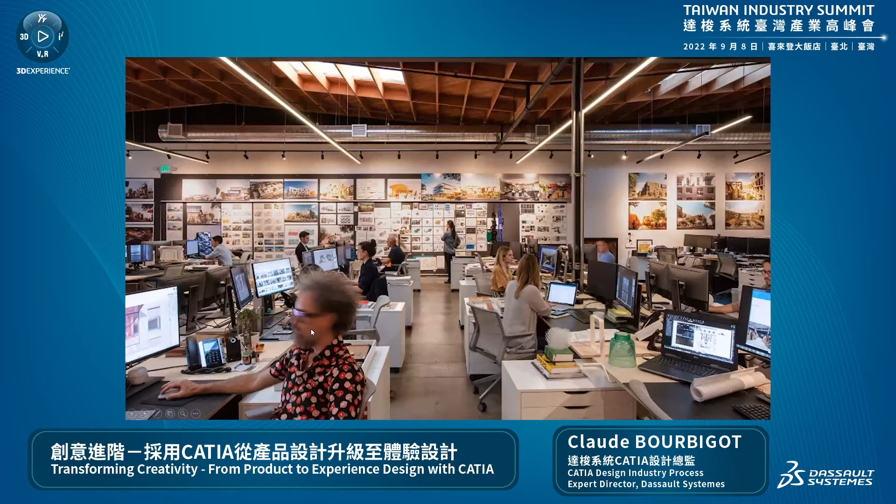One of the keys to drive these paradigm shifts is the design studio. They are at the forefront of innovation, but this is new. In the past, it used to be a mean to improve the style of a product, to make it appealing, more beautiful, but not really at the core of the innovation process.

Today, designers have a much bigger role and responsibility than ever before. They have to define new, exciting consumer experiences that can make a difference between success or failure of the product. We have to improve our design solutions to support them, their challenges, and their digital transformation.

So to make it, we at Dassault Systemes have our own design studio led by Anne Asensio, who is the former head of design at General Motors. What we do is to show, to prove, to explain how the platform can serve the new way of design, which we call the design thinking.

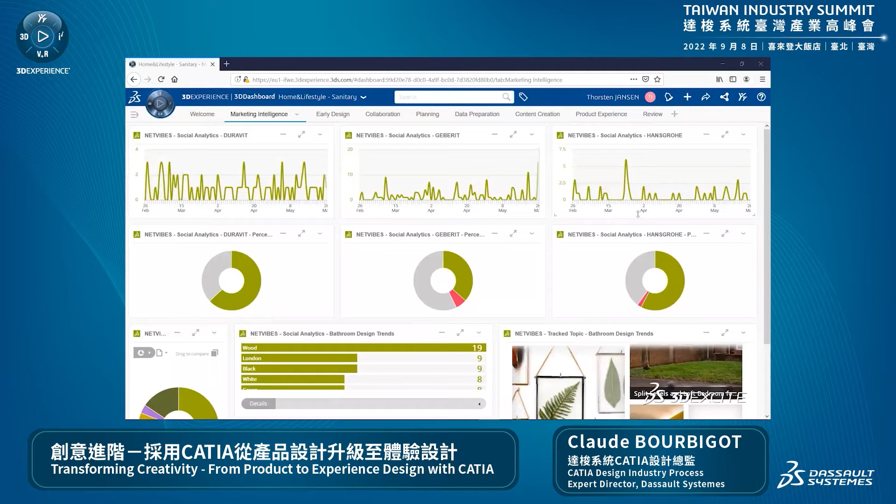So for this, we on the platform have Exalead and NetVibes. They are about information intelligence. They enable organizations to gather, align, and enrich big data. They deliver that information to users within high-value applications, the widgets that you can see here on the browser.

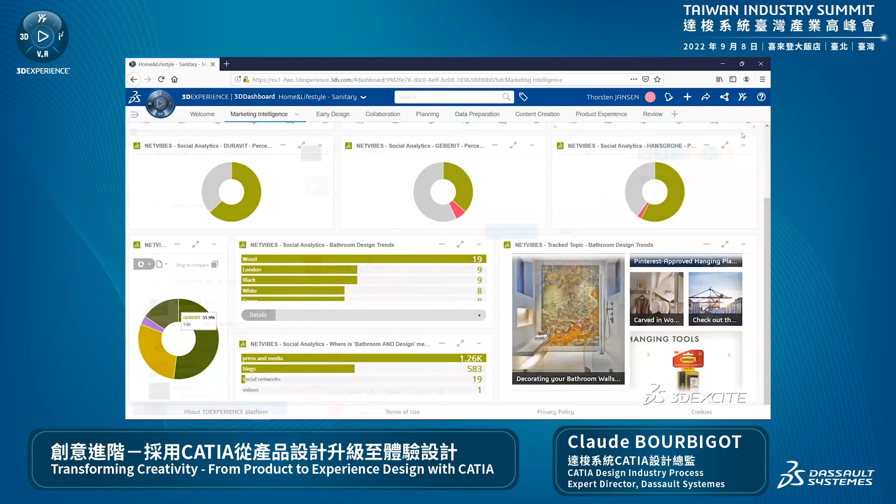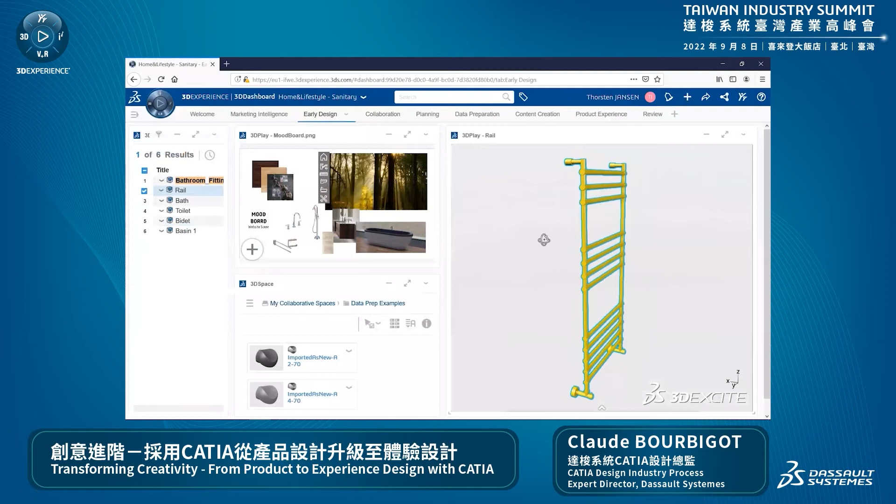Specifically, Exalead is a web-scale search engine designed for enterprise usage. It analyzes and enriches raw data by surfacing hidden information and relationships. With these analytics available, marketers and also designers can better understand the markets, the consumer behavior, and the community needs to tailor their offerings. Designers are able to envision compelling consumer experiences and make informed decisions, considering all relevant parameters.

So here in the video, you can see some of the widgets or the applications on top of the platform that you can use at the beginning. Here is the one for presentations.

So then let me move over to where Catia solutions excel the most, which is the ideate phase of the design thinking process. But first, I need to explain the overall split of the solution.

In creative design, we offer industry processes, roles, and applications, focusing first on creativity and ideation in the early stage. In the second domain, we call surface refinement, we are covering the needs of designers, modelers, and engineers for high-end surface with quality up to class A. We are also delivering solutions for the process of reverse engineering.

In the third domain, product experience, we are delivering visualization solutions for experts and non-experts. It includes high-end visualization for product presentation, but also design review tools and tools for perceived quality. Additionally, here we offer fully integrated individual and collaborative virtual reality experiences for the platform, and easy-to-use basic VR review capabilities for some of our legacy solutions.

We have a solution targeting creative designers. Good industrial design needs to be human-centric. Supporting this view, we have created the human experience applications in order to provide designers a human reference in the 3D space. It can be accessed at any point of the design process - at the beginning, ideation, or even at the later test stage. For this reason, we provide this 3D mannequin with all the roles and package by default.

It is available in many different variations and can be customized in size, proportions, and visual traits, with a vast set of postures already available out of the box in the core application, and changes possible on the fly. We believe that with this, a big part of possible user scenarios should be addressable. So you will see this mannequin later in my next videos.

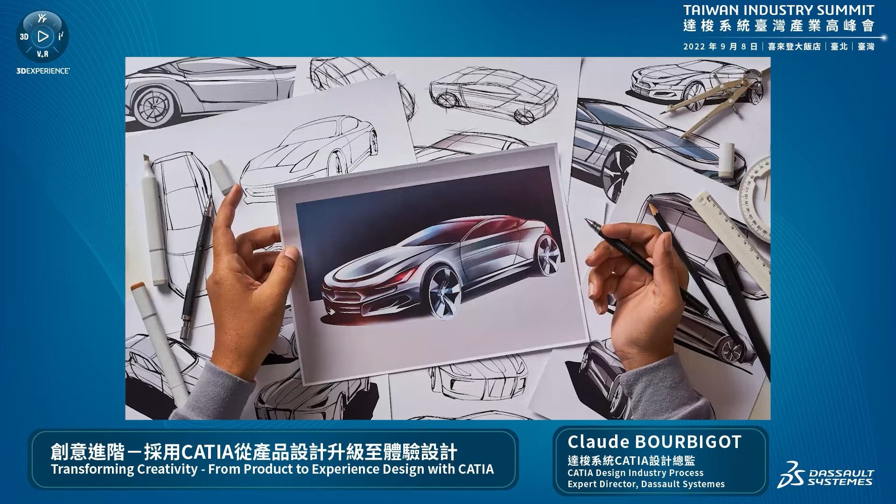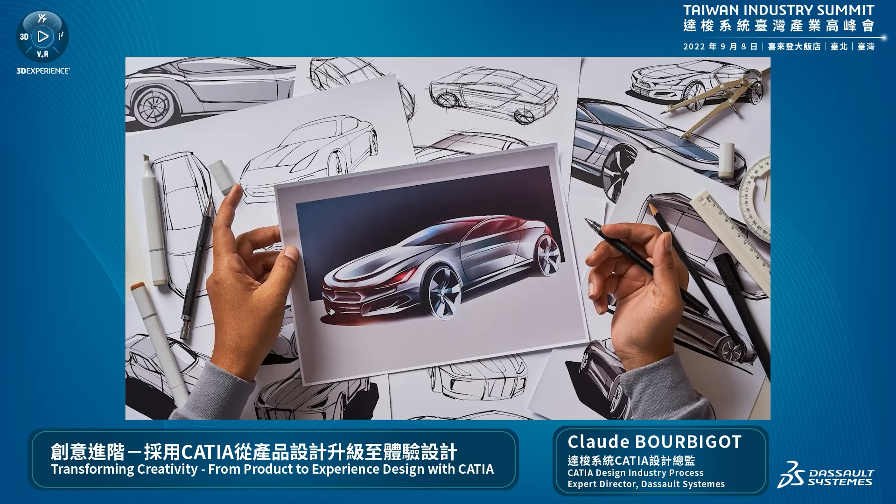The second important thing is about sketching. Of course, 2D sketching with pen and paper is still very appealing to creatives and designers. Nevertheless, there are downsides to this conventional approach. To communicate design intent, spatial correctness is really difficult to achieve. So also, while we all love sketches with emotional and artistic exaggeration, it is in fact often creating misconception about the object, especially with modelers who need to transform this idea into a first concept.

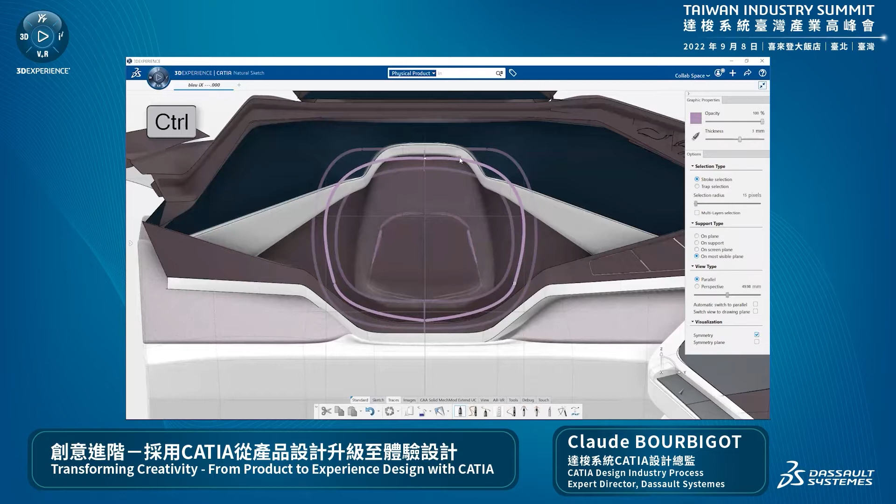Therefore, we developed Natural Sketch. Natural Sketch that you see here, a screenshot done with a Wacom tablet, offers a very elegant and progressive way to satisfy both the need for artistic expression and spatial accuracy.

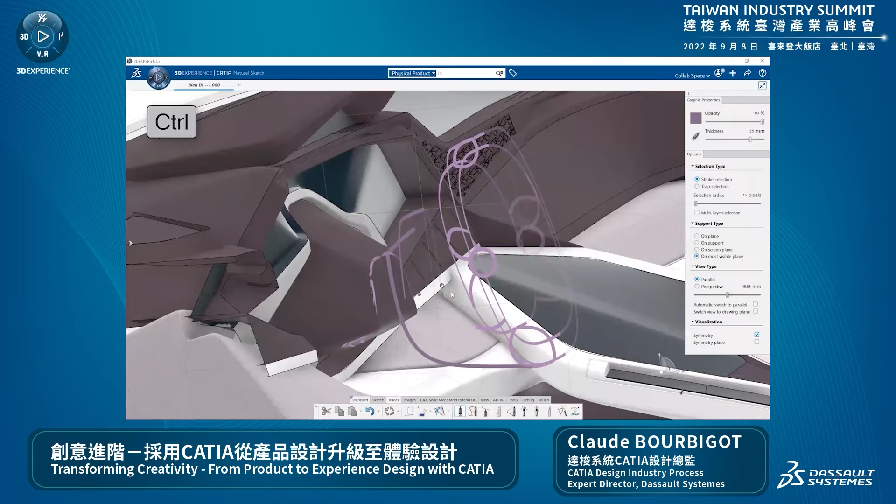Designers can start out in a very conventional 2D fashion by starting to sketch in views or using as reference scanned images of their paper sketches, even in 3D. Thanks to dedicated commands, the step from 2D to 3D is quite small. 3D curves can be created from sketching a curve from 2D views. As the resulting output could be Bezier curves, you can edit and modify the shape, also using direct modeling techniques like control points, or simply redraw and modify it by another pen stroke.

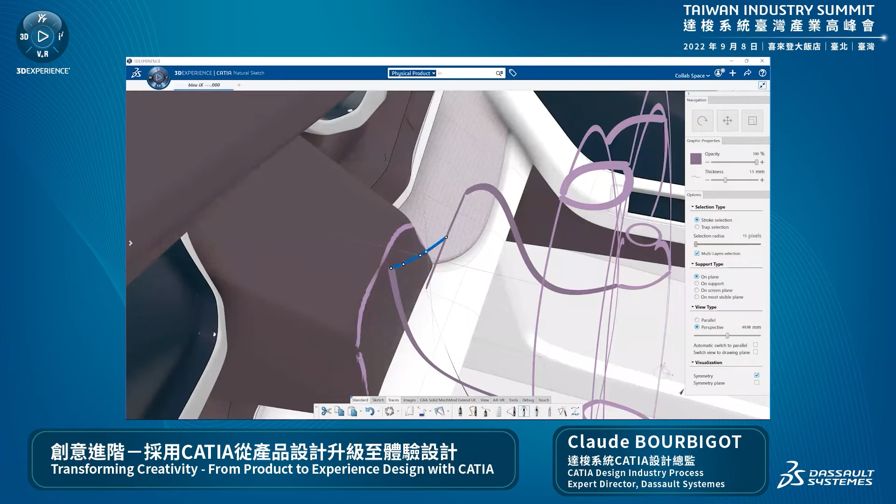So the biggest benefit of being in Catia's 3D environment is to be able to use existing 3D geometries and parts as a reference of the initial design. This will be shown in the next video.

So this I want you to see. Yes, the last thing is that if you have an existing surface, you can draw on top of it as well to continue the detail. And that's an example of a steering wheel output that you can get with Natural Sketch.

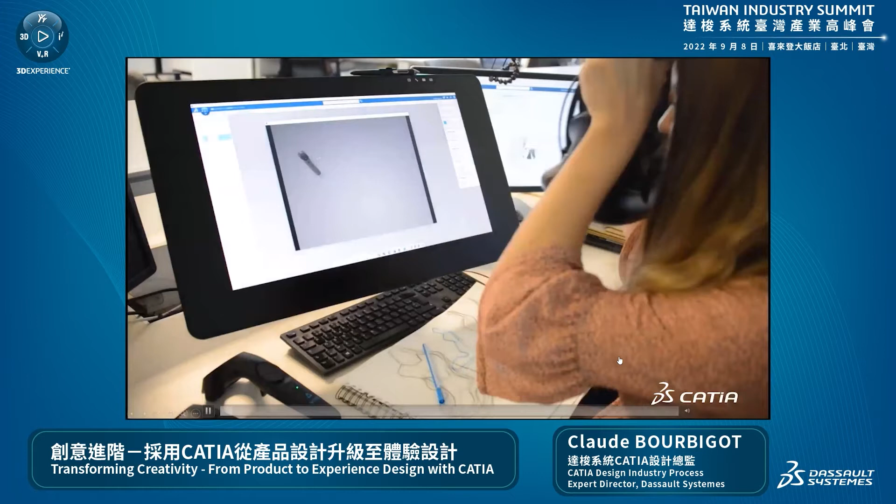But there is a next level, and the next level is VR. With Natural Sketch, we can also do it in VR. Thanks to the full immersion, proportions and shape can be experienced more realistically. A dedicated user interface allows creating designs directly in 3D space with the controllers of the VR head-mounted display.

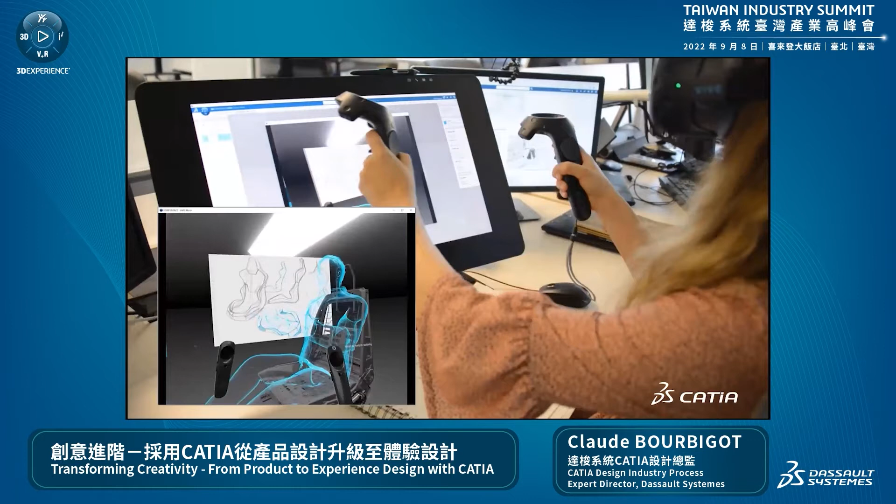We think that a hybrid approach, VR and non-VR, is best. For instance, one workflow is to start out with digital pen and tablet to create the first 3D curves, then move to VR to modify and experience the space more intensely.

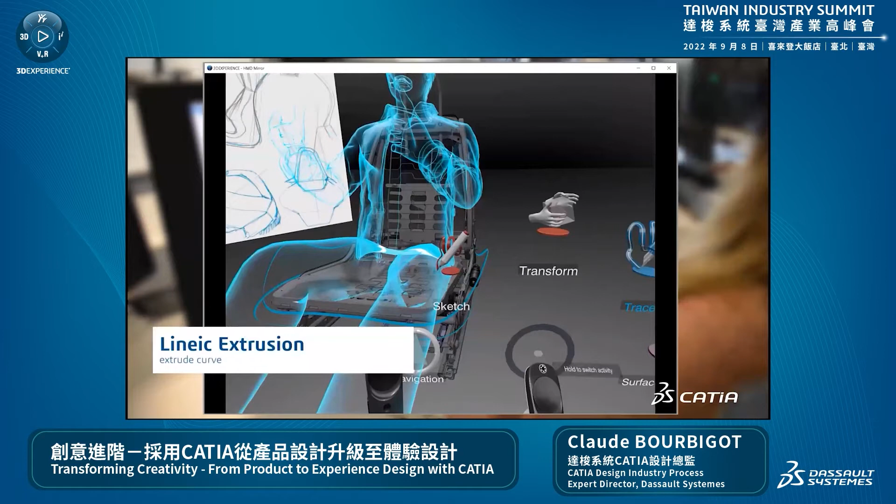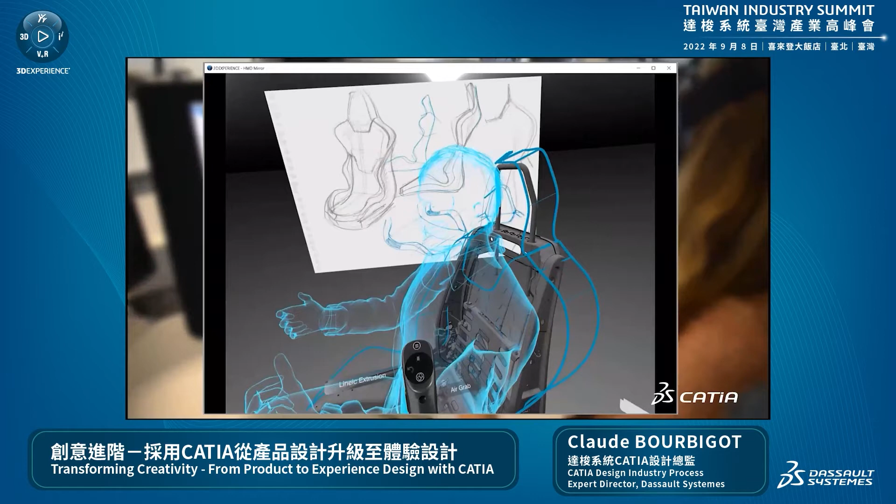On top, you can see here one of the biggest benefits of being on the platform is to access engineering data natively without the need for conversion. So you make sure that design is taking into account all the technical constraints from the start. You can see also here that the designer is sketching around the human as a reference, the mannequin again.

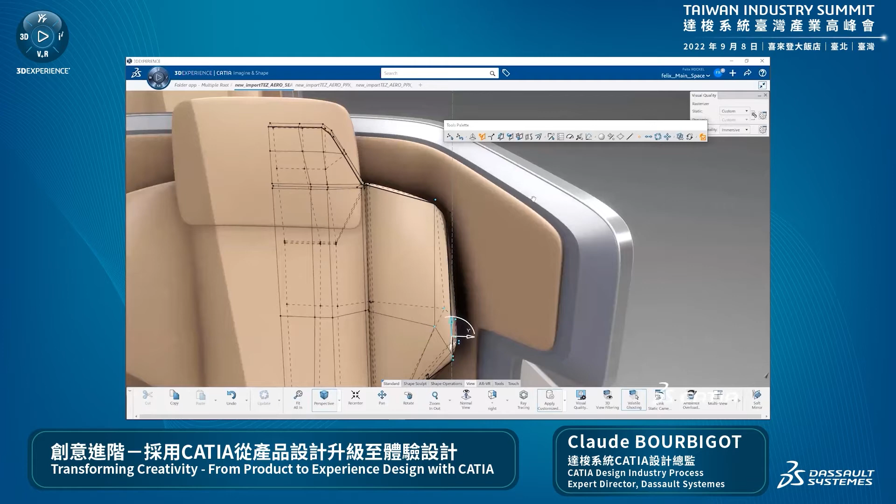So without transition, moving on to concept modeling, let's have a look at Catia Imagine and Shape. Whether you are starting out based on the curves created by Natural Sketch or not, IMA enables users to quickly create curvature continuous surfaces while avoiding all the difficulties of classic surface modeling.

It's based on subdivision surface technology, but delivers a unique modeling experience. While the creation of the base mesh follows the rules of polygon modeling, at the same time, in parallel, Catia creates a surface, so there is no need for additional operation to create usable surfaces.

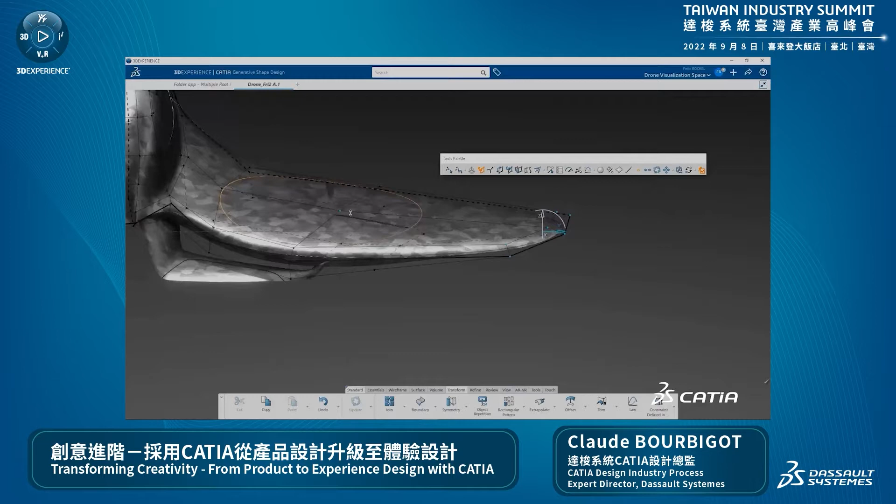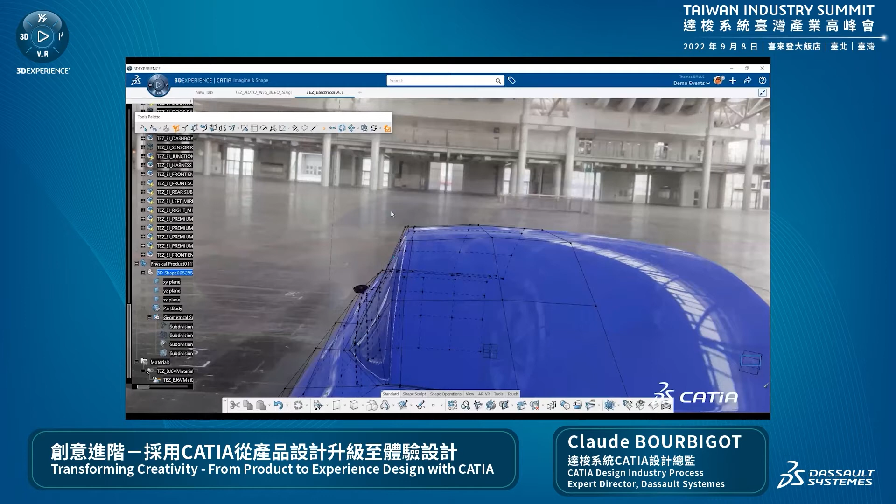Also, these surfaces can be passed to any downstream process, for instance, for engineering. It can be started in parallel, saving decisive development time. So we can mix subdivision surface with NURBS and Bezier, no problem. You can cut Bezier NURBS with subdivision surface, but you can also do the other way around, like adding fillet to an edge of an IMA surface.

Thanks to the ambiances provided, modelers are able to experience their model in different environments and lighting in real time, allowing for a better understanding of shapes and surface quality. You will see this in a few seconds.

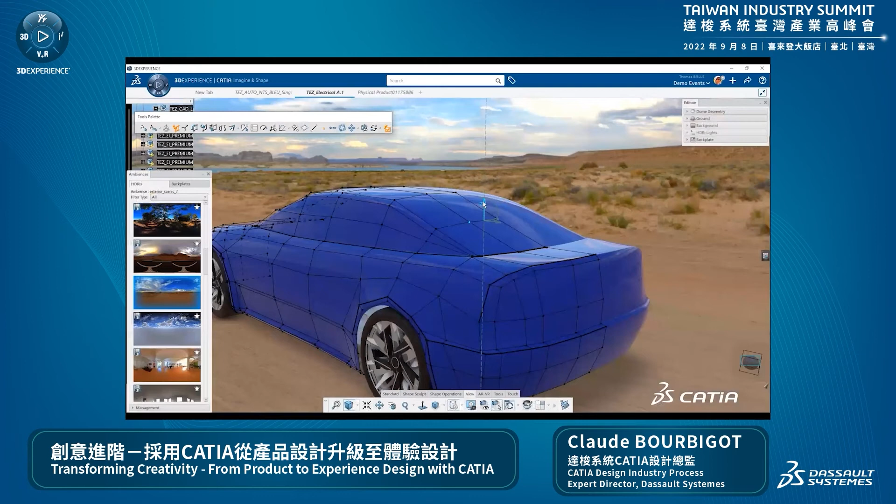As another added value, users are able to launch the real-time ray tracing engine with a click of a button, like here. The global illumination technology provides physically correct rendering, so users can switch between modeling and reviewing the product in a flick of an eye.

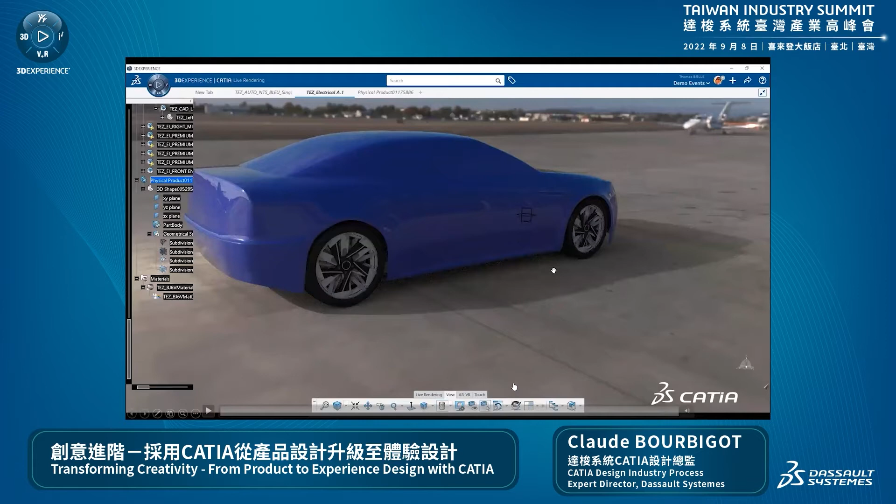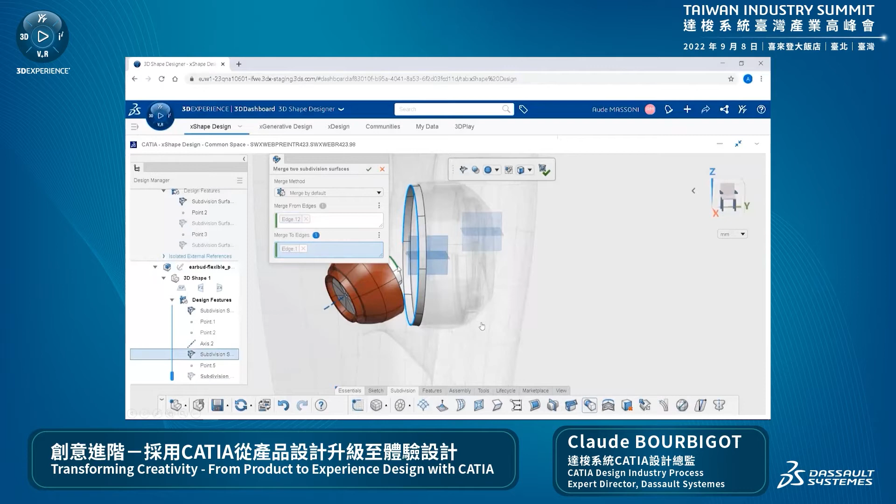Also, recently, we have introduced a new role for nomad designers. They need a high degree of freedom in terms of accessibility of tools and mobility. This solution is cloud-based and accessible via web browsers, nothing to install, which means the applications can be used on mobile devices too.

One of the trends in recent years has been to introduce 3D patterns inspired by nature and integrate them into product design. We introduced Catia xGenerative Design for this. Functional nodes are combined to form complex generative algorithms, which in turn generate complex geometric patterns in 3D space. It's also based on cloud and accessible through a browser.

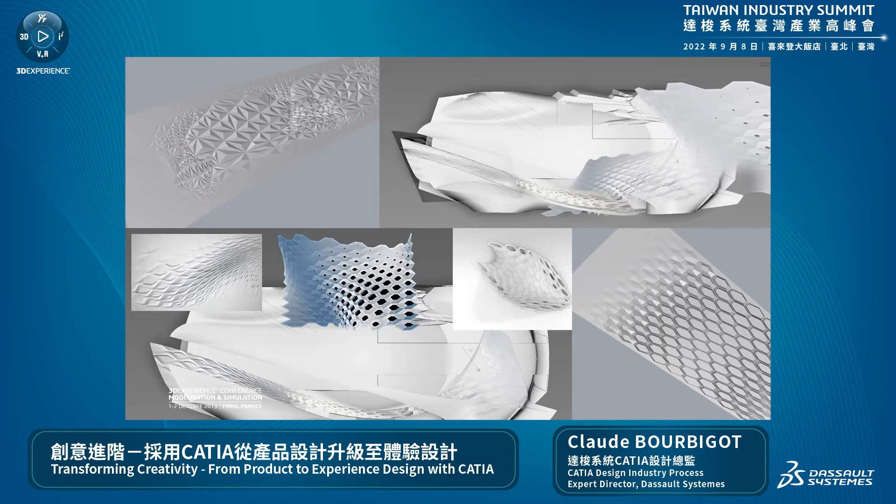So now let's move to the next stage in the design thinking process, which is prototype. It corresponds to our surface refinement offering. Historically, ICEM Surf, as part of our portfolio, has been and still is the leader for explicit Class A modeling in the world. So you can do very quick Class A level shapes without history and direct modifications. But in order to address the needs of our customers for a fully integrated Class A solution in Catia, we created Catia ICEM, which is fully associative and parametric Class A modeling solution.

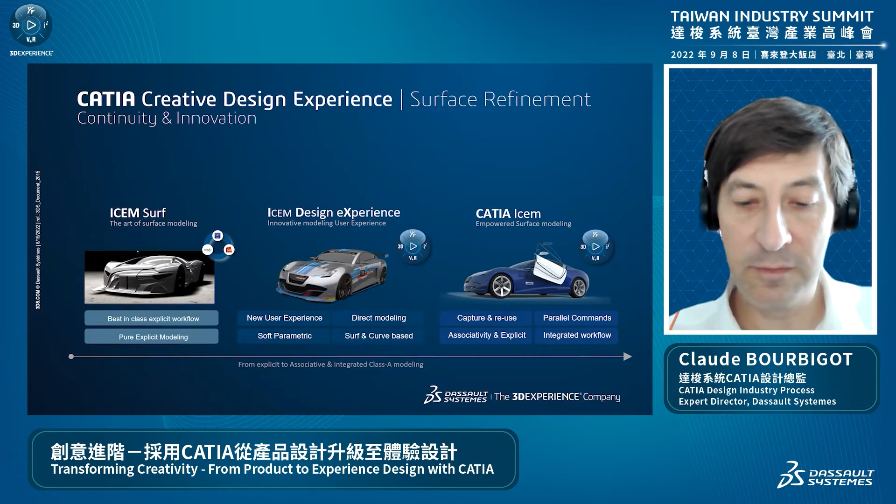Now let me introduce our new leading solution in this domain, ICEM Design Experience. It merges the two user communities, ICEM Surf and CATIA Icem, and the two modeling philosophies, into one application within the platform. So with IDX, we deliver a new level of productivity and innovation.

We have been studying the user experience in our current solutions and focused on reducing mouse mileage and clicks. We want to offer a new user and new modeling experience to customers of our legacy solutions like ICEM Surf, but also those moving over from competitor solutions.

ICEM Design Experience is not only for Class A, but also for CAS modeling. Sorry, I saw that I had some video issues, so you will be able to cut here if necessary. So let me continue.

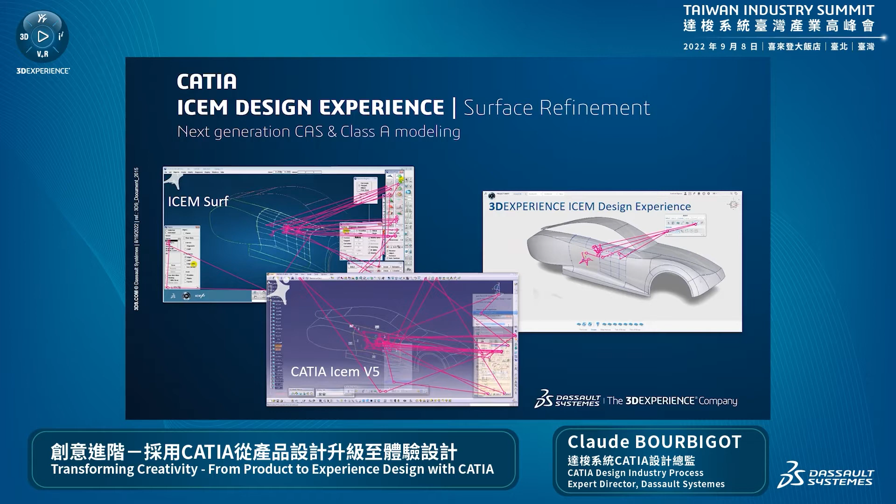So here is a video of the philosophy of ICEM Design Experience. I'm not using a complex car model, but you can see the principles. Direct modeling, like in ICEM Surf, is where you can do direct modifications of any curve and surface on the screen. You have full control, but there is no automatic update.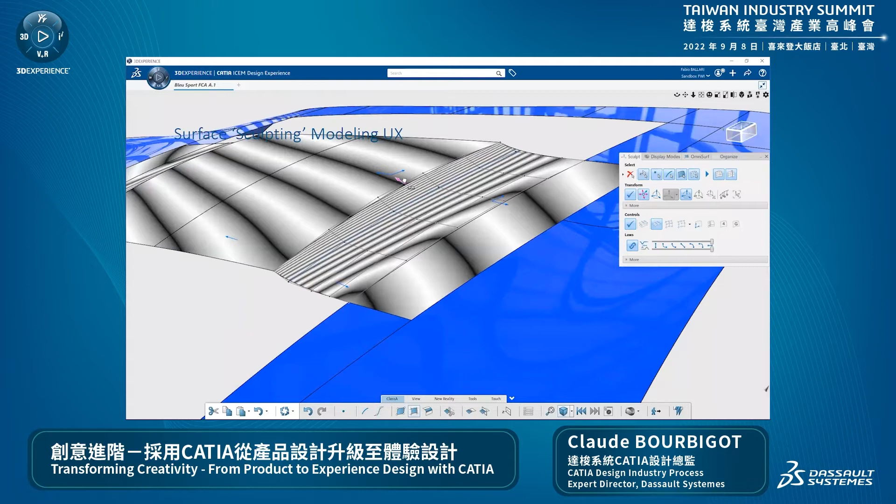Parametric modeling, like in CATIA ICEM, allows for changing a model with parameters, and the whole history of the model is then replayed automatically, but you lose the history if you change geometry directly. With ICEM Design Experience, you can do direct modeling and parametric modeling at the same time without losing history.

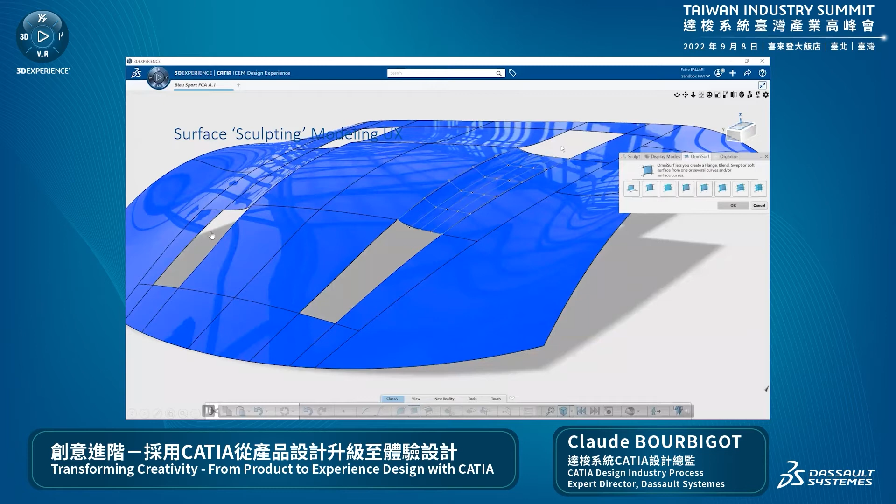So there are three key ideas of IDX: very few but smart modeling functions, which we call OmniSurf, OmniCurve. Direct sculpting is always possible in parallel, and this sculpting is kept on the surface also after parametric update. Continuity between surfaces and between curves and surfaces is always maintained, so you can sculpt both the input and the output surfaces.

So Catia is able to provide all the tools to go from a first ideation over to a first 3D concept, over to a high quality surface model. We deliver flexibility in the early stages with Natural Sketch, IMA, and X Generative Design, the new innovative tool for generative modeling. We deliver precision, which is required for Class A, with ICEM Surf, CATIA ICEM, and ICEM Design Experience. And we deliver power with the associative parametric capabilities of the Catia geometric modeling core on the 3D Experience platform.

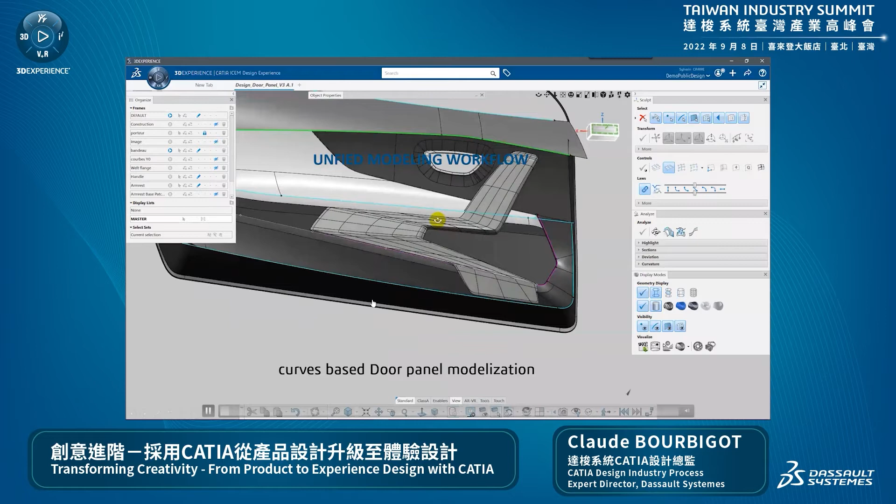So I wanted to illustrate this with the interior door. We called it unified modeling. We brought together surfaces and their features from all our relevant creative applications. On top, we have IMA subdivision models, and below you have the ICEM Design Experience surfaces, Bezier curves, and Bezier surfaces.

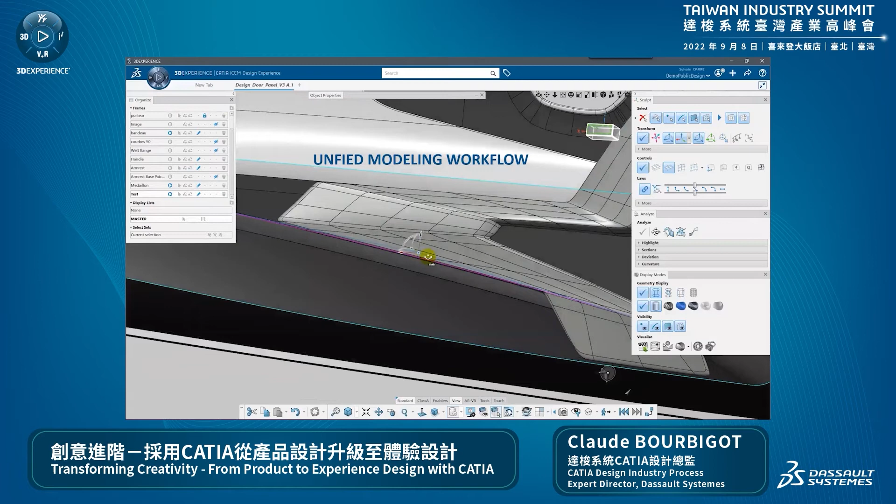So with ICEM technology, with this new software approach, users are in full control of when changes are promoted to the geometry. They can choose when to trigger the update. Let's see again here. They can choose when to promote.

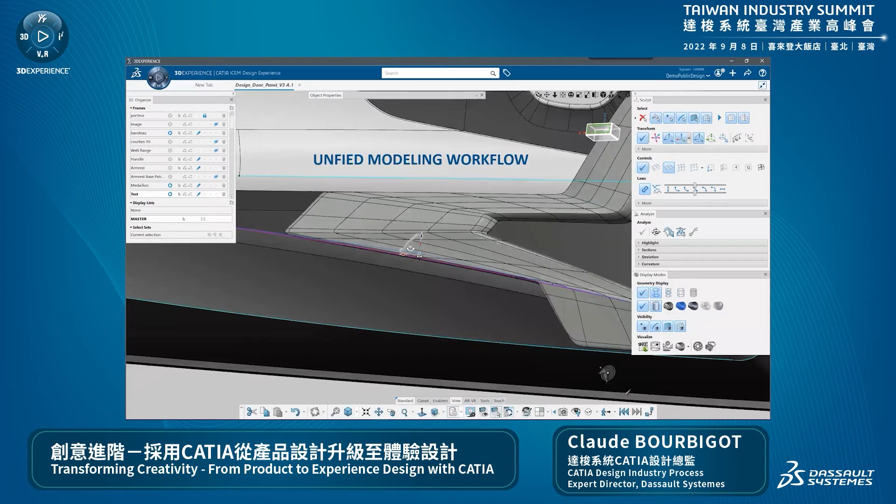They can choose when to trigger the update and when to pause it for a given group of geometry, with a great impact on performance.

So now let us move aside a little from the full digital continuum. I want to talk about reverse engineering. There is a trend in recent years to be fully digital, mainly for cost reasons.

Yet we have customers reaffirming their need for physical prototypes and reverse engineering because physical models still deliver a better basis for design confirmation.

So for this purpose, we introduce new functionalities to our existing solution, like fictive edge, or rework new surface network command, amongst others.

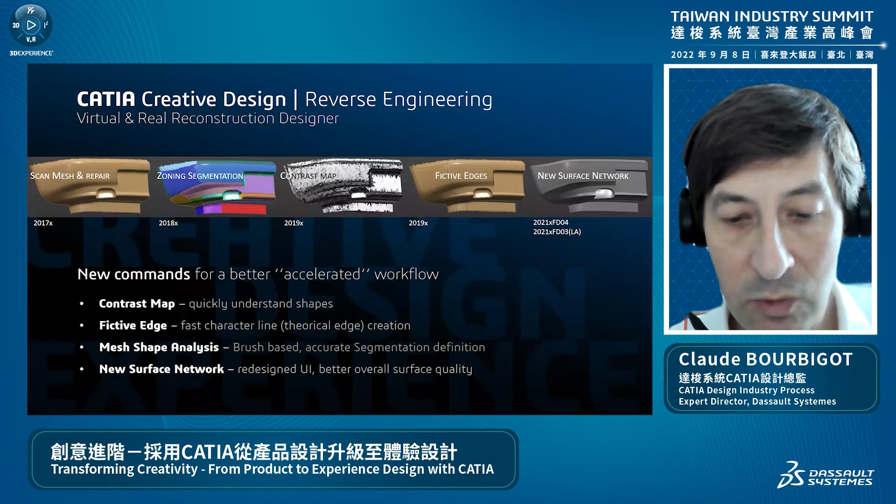And this is to go super fast in the reverse engineering process. So there is a need for increased productivity to get this process to a competitive level.

Which we believe is achieved by introducing those tools. The motto is to automate as much as possible to the max, but at the same time, ensure there is predictability and quality of the outcome.

So this is an illustration with the new surface network command.

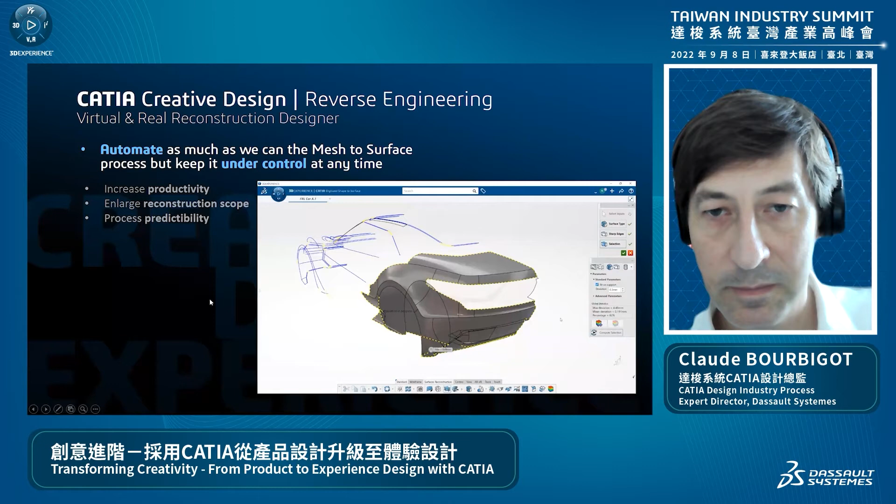But I want to emphasize the results of some benchmarks done at DS and at customers. So here you see 5 hours for an exterior car that we improved, and the initial time was 1 week.

If you do it in Catia V5. So on the first shot, we have approximately 10 times faster than in V5. And in 22X, we also support the replacement and update of scan data to be even faster.

Finally, let's look now at how we can verify and test our new consumer experience or product in our digital and virtual environment. In our next category called product experience, we take a look at high-end visualization first.

One of the most sophisticated scenarios for visualization is automotive lighting. On one hand, all the technical inputs and constraints in terms of light physics and physical parts need to be taken into account correctly.

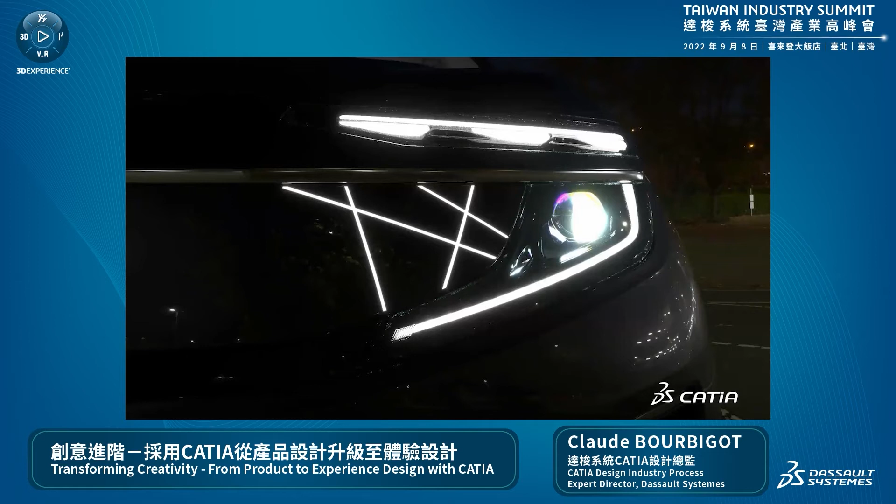But also the vision, the artistic vision of the light designer. The overall complexity is staggering and the process time-consuming if the virtual tools are not able to properly represent it.

So, we are providing those solutions. Thanks to the stellar render engine, local network functions, and animation capabilities, users can simulate all the lighting scenarios envisioned by design.

Designers will be provided with a realistic and physically correct representation of their design in the virtual world, and we believe the decision-making process is enhanced decisively.

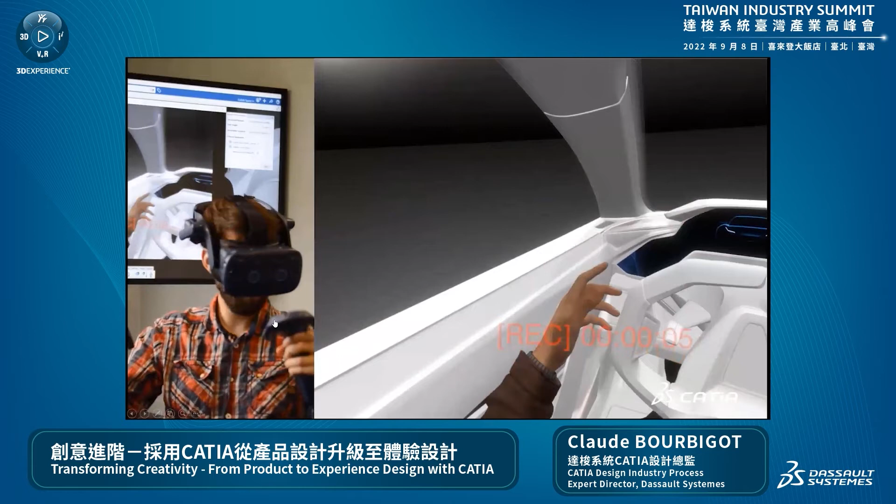As another highlight, we have introduced the capability of active human incarnation and motion capture, as you can see here, available within the VR roles. We can add an immersive VR experience on top of any 3D model.

For ultimate realism and the design of the experience itself, this motion capture is recorded here and can be replayed and edited later on.

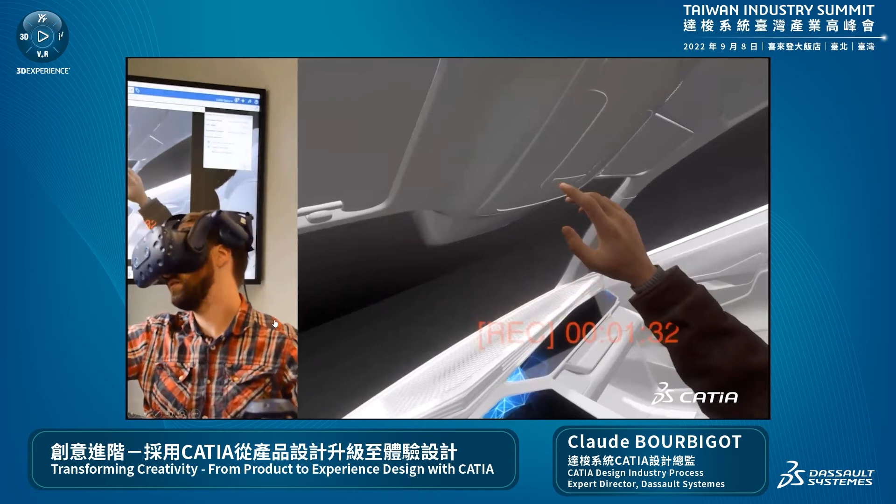You can see here, you can have a full motion capture of people walking, people running as well, as far as the HMD allows.

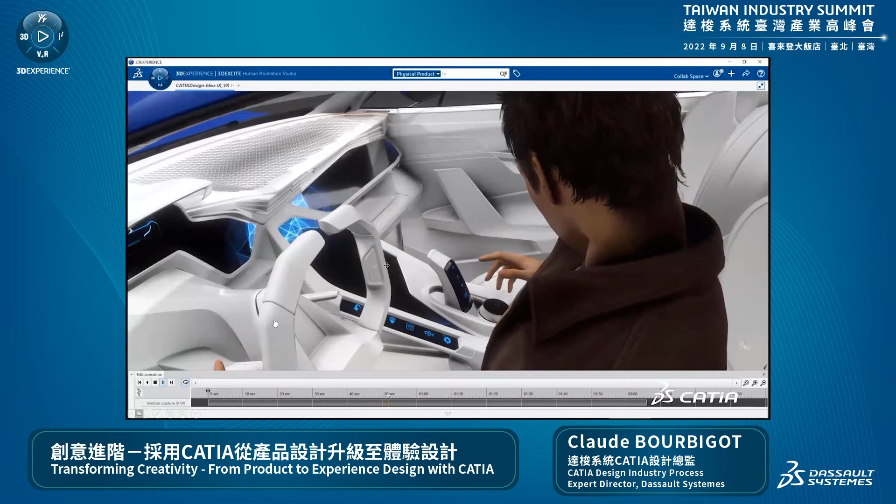Another important use case for visualization is ModSim. Catia and Simulia applications belong to the 3D experience platform. So this tight integration of modeling and simulation is what we call the ModSim Paradigm.

It breaks the silos between design and engineering. As we can see here, even very complex airflow simulations are possible without the need to use simulation tools outside the platform.

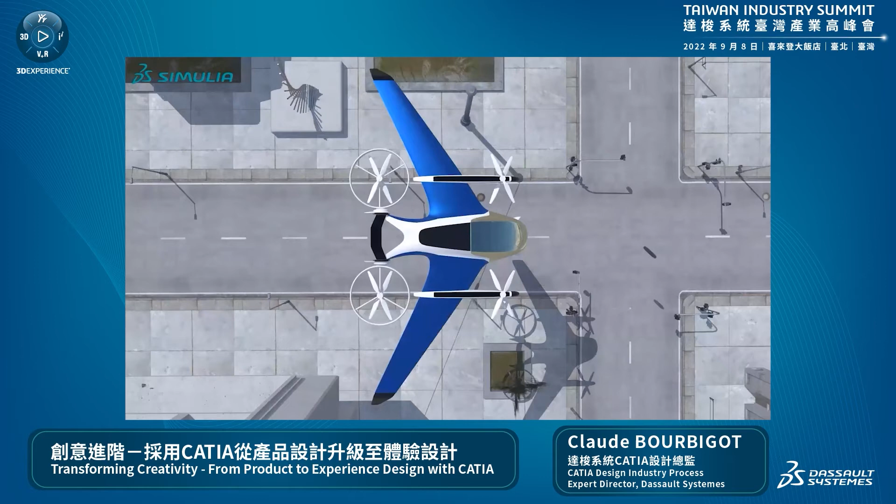You do not need any data transfer, slowing down the development process, and you can naturally perform design reviews across departments.

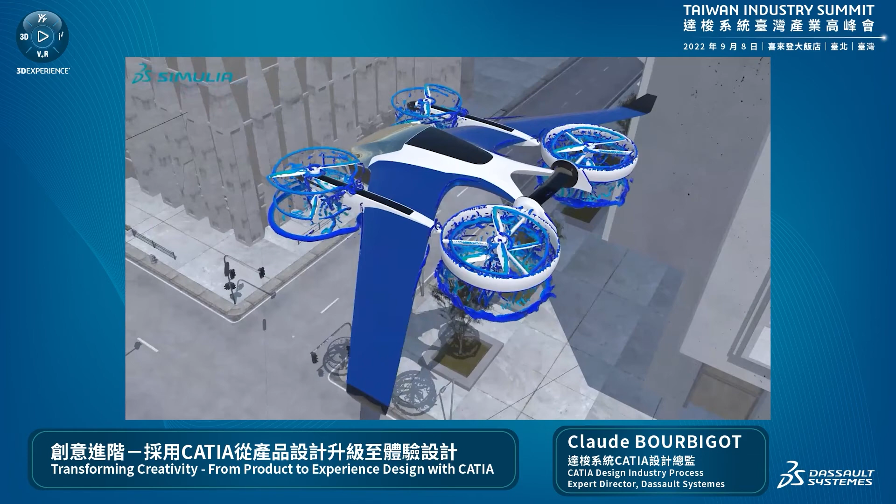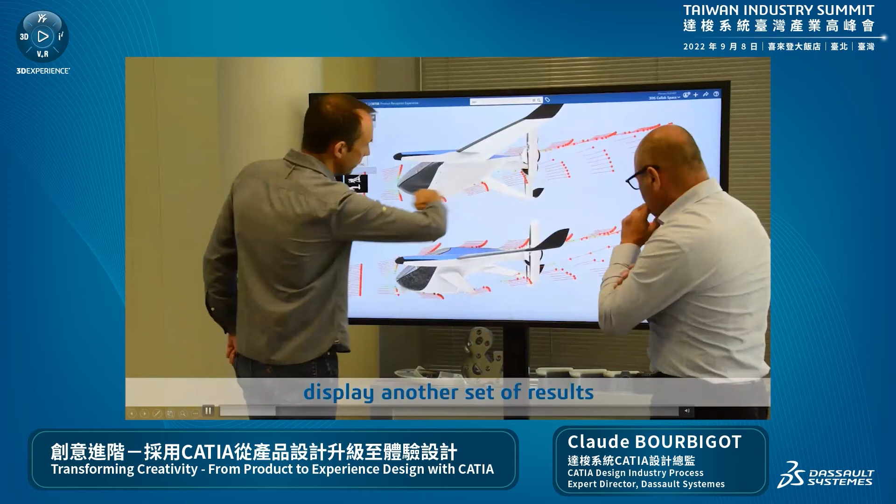But since 22, those simulation results are supported in the application product experience design, allowing designers, engineers, and simulation experts to review the virtual twin.

Define and experience variants to make the right decisions without complex manipulations.